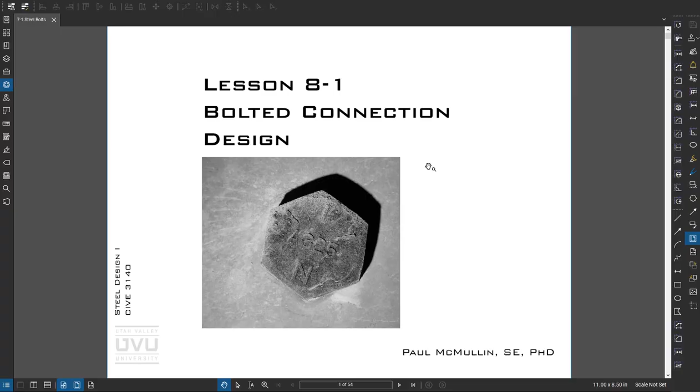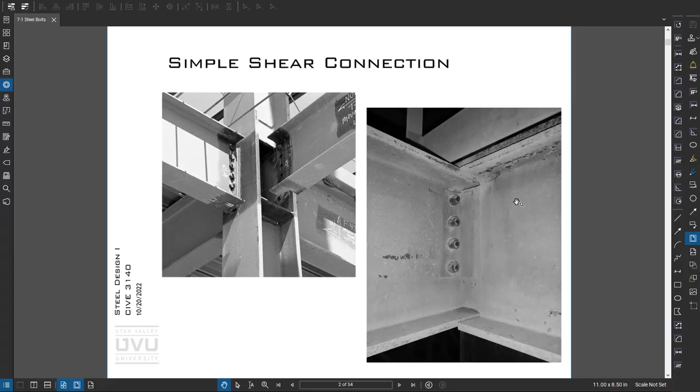All right, guys, let's dive into bolted connection design. So bolts replaced rivets a long time ago. At first, they were viewed skeptically because rivets are extremely strong and robust, and they have a high clamping force. So at first, people were slow to pick up bolts, but over time, obviously now they're the way we do a lot of things. They're great for field connections because they don't require welding, which tends to be far more sensitive to environmental factors.

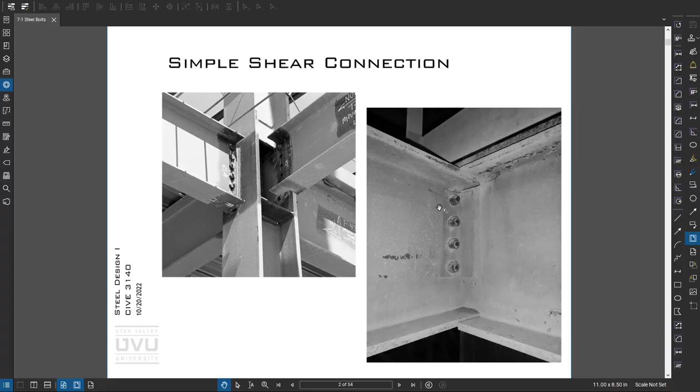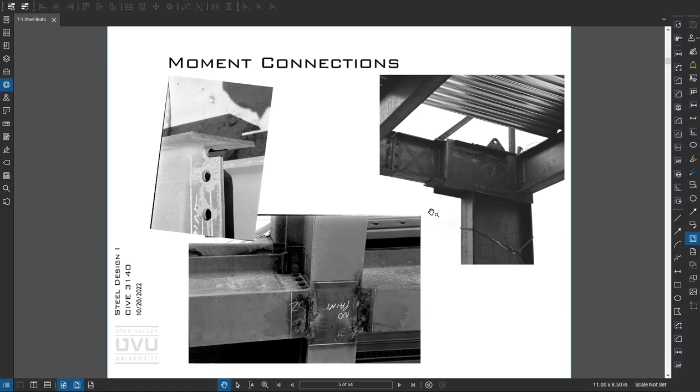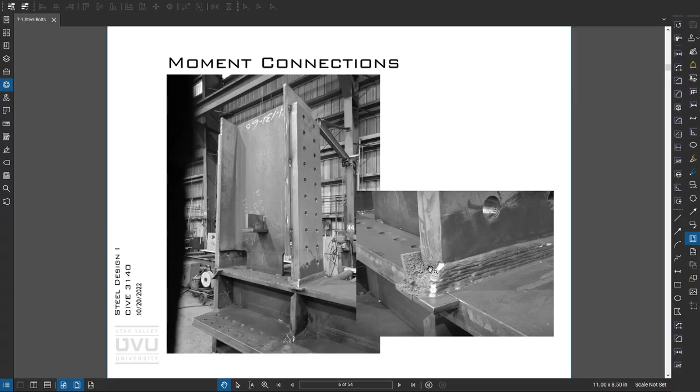Moment connections. You can see here these heavy welds. Here's the joint prep. So that whole face where it meets a column or a flange is welded. Here's a heavy moment connection using plates on the sides. Another moment connection in the shop. You can see how much weld goes into these. These are runoff tabs. So this gets cut off and ground. That way there's room for kind of the crap of the weld to land here, and by the time they cut it back to here, it's nice and clean.

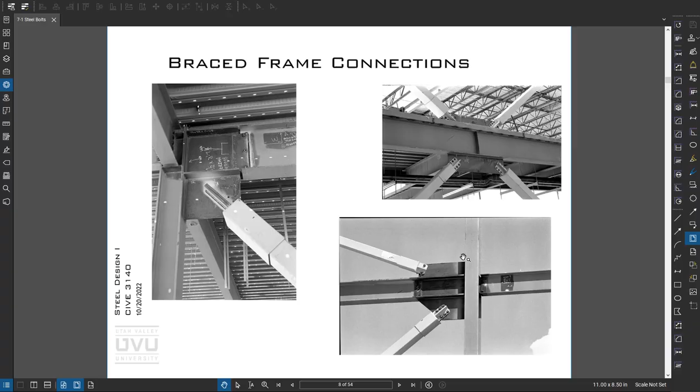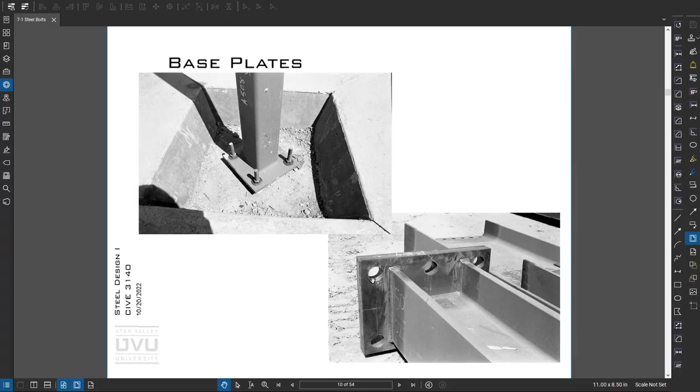Some base plate connections. This one has oversized holes, which allows for some misplacement of the anchor rods, and then heavy washers go on top of those holes. Sometimes they're welded, sometimes they're not. Just depends. Here's an old base plate. Here's a base plate with a shear lug. So that lug goes down into the concrete, into a block out, and it's super effective for transferring large forces.

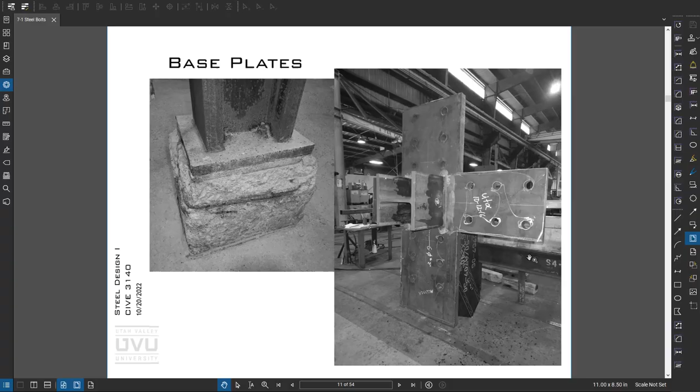Okay, so structural bolts, there's three main classes: snug tight, which are basically tightened with a wrench. Pre-tensioned bolts are tightened all the way, well, close to the bolt's breaking strength. And then slip critical are pre-tensioned bolts, but the surface prep is considered carefully.

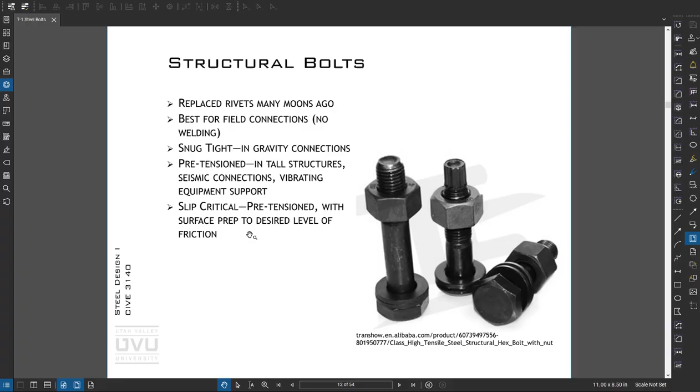Different grades. AISC recently introduced groups, so Group A, B, and C. C is fairly new. Group B is the old A490. Group A, which we use extensively, is A325. Keep in mind that there's a trade-off between ductility and strength. So the higher a bolt gets in strength, the less ductile it becomes. So if Group A bolts work for you, I would suggest going with them. If they don't, you need some extra strength, 490s. I've never seen Group C specified, but there's no reason you can't use them if the code permits them.

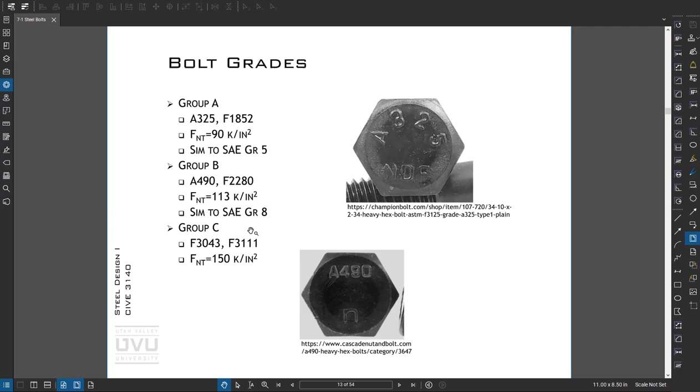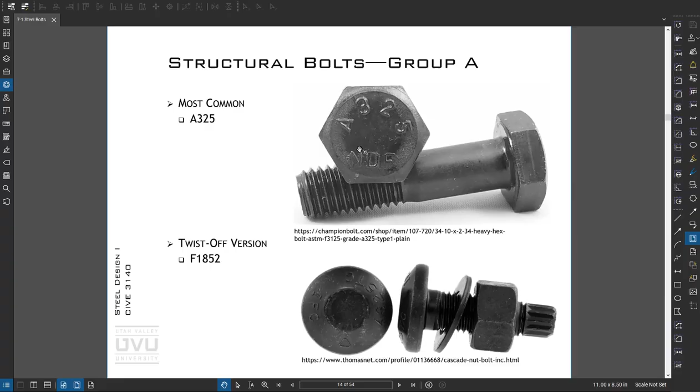All right, there tend to be markings on the bolt which tell you what grade it is. If you go to a job site and you can't see any markings, and sometimes they're not numbers, sometimes they're little lines, you need to ask more questions to find out if they used the right bolts. Nuts, we use heavy hex nuts, which tend to be larger than the normal stuff you buy at Home Depot.

All right, different washer requirements. Unhardened washers you can use with standard holes. You also don't need washers if the bolts are kind of milled properly. Hardened washers we use on the turning surface at slip critical connections. That way there's no galling between the nut and the base metal. Galling is when little balls or little gouges form, and that increases the friction, which decreases the pretension.

If we have long slotted holes, we add plate washers to cover the hole, and then channels and S's. You can see here on this channel the flange is tapered, so it has a washer that's also tapered. And that allows this face and the top face that you can't see to be parallel.

And then tension indicators, there's two types. One are these direct tension indicators. So when the bolt gets pre-tensioned, these little nubs compress, and using like a spark plug gap or those thin strips of metal, an inspector can slide them under, and based on the manufacturer's data, they can tell if it's tensioned up properly. And then these washers here have little paint pockets that when it gets to the right tension, those paint bubbles pop and squirt out.

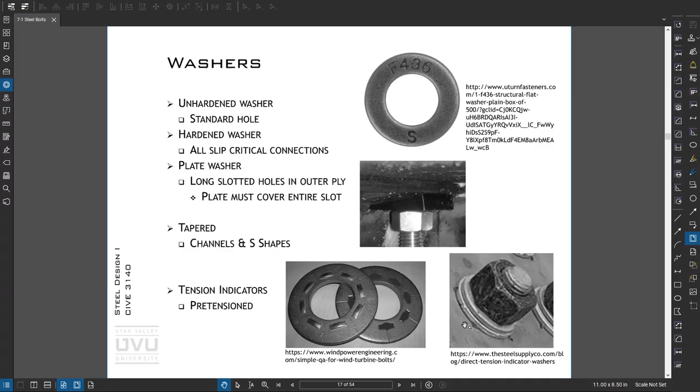All right, low strength bolts we can use for low strength applications. They'll have an A307. Sometimes there's like little lines, different markings. If you don't have a number, then figure out what those little lines mean, and that's sometimes easy enough just with Google.

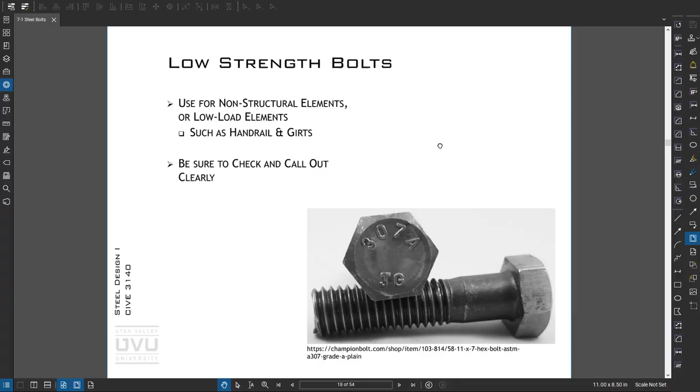All right, projection. Some people will ask, how far does the tip of the bolt have to stick out past the nut? Short answer is it does not. Well, the long answer is that as well. Basically, if the nut and bolt are flush, the nut has the strength to break the bolt. That's the concept.

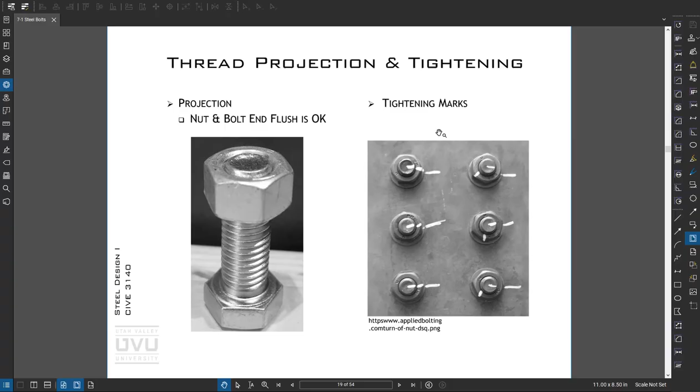Here's some tightening marks. So in this case, it's agreed upon beforehand between the installers and the inspectors how the nuts will get marked once they're tightened. All right, you can watch that bolt video. It's not the most exciting thing, but it'll give you a feel for what's going on.

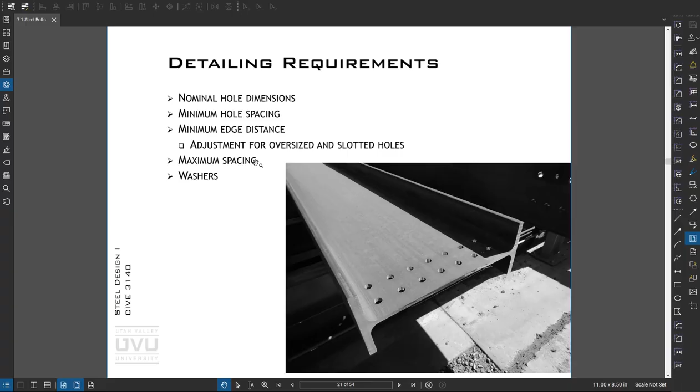All right, so some requirements on detailing, and this is important to understand how it's going to be drawn and built because that's going to flow into your calculations. So there's detailing requirements for all of these things, so let's go ahead and jump into them. First, the nominal hole size for bolts. It tends to be 1/16 over the diameter. So if I have a 1-inch bolt, I have a 1 1/16 inch hole.

There are oversized holes, so those are slightly bigger, and then short slots and long slots. We use oversized holes and slots when we think the mating parts aren't going to line up exactly. So if I'm connecting a beam to a concrete wall, I will use long slots because that buys me some tolerance if that wall is not perfectly plumb, or perfectly where it belongs, which happens. Concrete tolerances are at least plus or minus an inch.

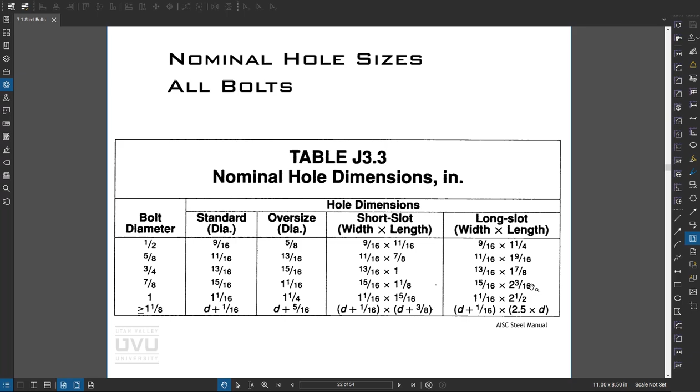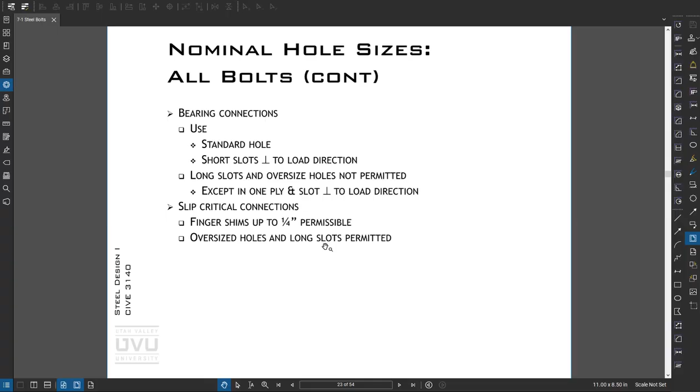All right, so nominal hole dimensions. Here's a little bit of a discussion of when to use them. So for bearing connections, you can't use oversized holes because they allow for too much slip. So you can use standard holes or short slots where the force is perpendicular to the long dimension of the slot. And then slip critical, you can use oversized holes, long slots, short slots, because the force transfer happens through friction in a slip critical connection. So if the holes are bigger than the bolt diameter by a lot, then the friction carries the force.

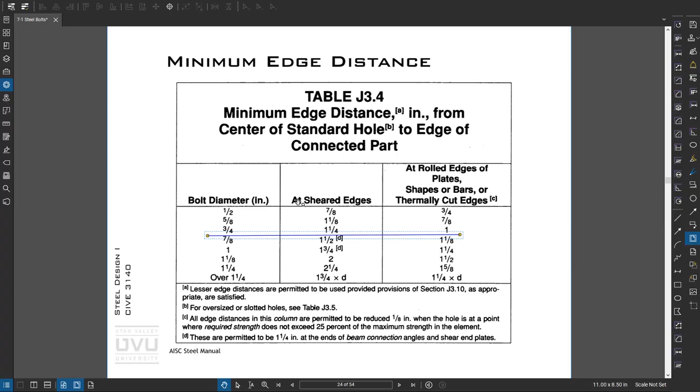Minimum edge distances. So this table is a little outdated. It's actually this side now, where for a 3/4 inch bolt, which is the most common bolt, the edge distance is 1 inch. They got rid of these in one of the code versions recently. All right.

Hole spacing. So the minimum is 2 2/3 times the diameter. Preferred is 3 times the diameter. But in practice, if you can use a 3-inch hole spacing, that's ideal because that matches shop equipment. Back in the day when dinosaurs roamed, the drill lines had drill chucks every 3 inches, so you could have multiple drill bits running at the same time drilling holes. And because they were 3 inches apart, that kind of became the standard spacing for holes. So usually for 1 inch bolts and under, we'll use a 3 inch bolt spacing. And then when you get to the larger bolts, then it needs to go up.

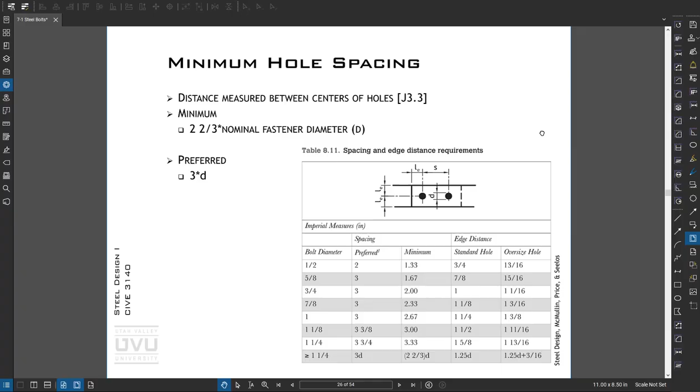Anchor rod sizes. Let's say we have a 1.25 inch anchor rod. You can go up to a 2 1/16 diameter hole. And again, like we talked earlier, that is for the purpose as if the anchor rods on site were misplaced or slightly off. This gives the ability to not have to mess around with the bolts or the holes in the field. You can just set the column, adjust it, and then we put a washer, and it tells you the minimum size over the top of that hole to make up for the gap.

I would suggest doing this on every project because when you stop and think about locating anchor rods, first surveying them correctly into position and not having them move during placement of concrete, things do shift, things are going to be off. So giving the field flexibility that they don't have to call you or stop the job to figure out what to do because an anchor rod is a 1/2 inch out of place.

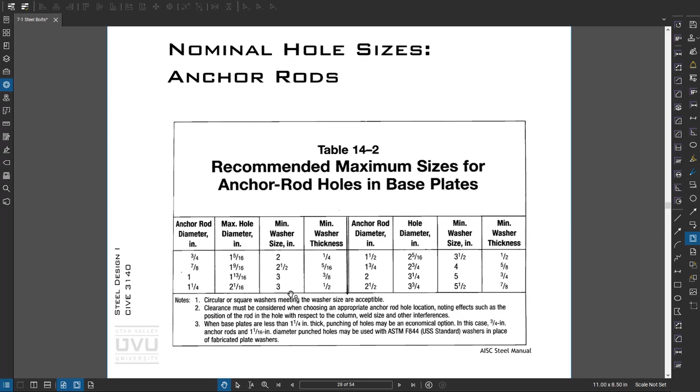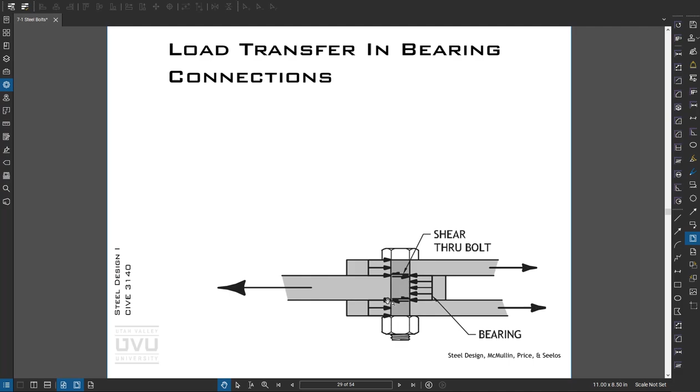Okay, let's get into force transfer of bolts. If we have bearing connections, let's say the force comes from here, it's going to bear on the bolt head or the bolt shaft. It'll transfer through the bolt in shear and then back into the other piece of material in bearing and then back out. So that is a very common type of load transfer in buildings.

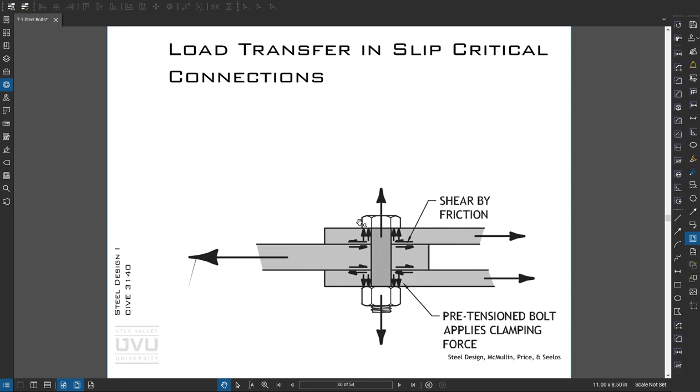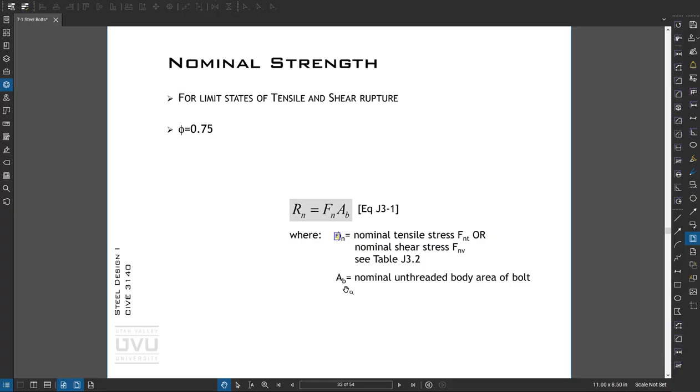I tend to always use the not excluded because I don't have full confidence that that won't happen in the field. Bolt lengths get swapped based on need, and I think it's not quite accurate to think that if I say I don't want any shearing threads in any shearing plane, that really will be 100% guaranteed.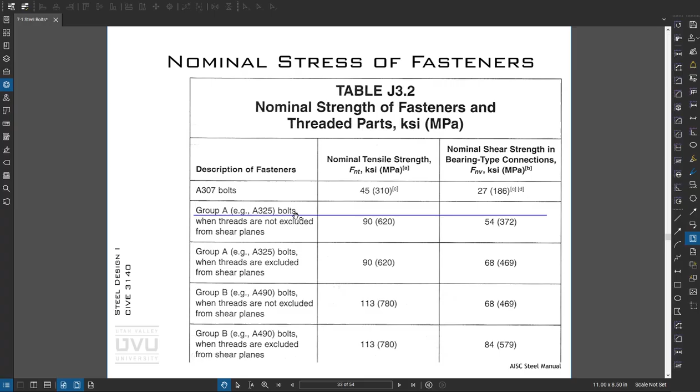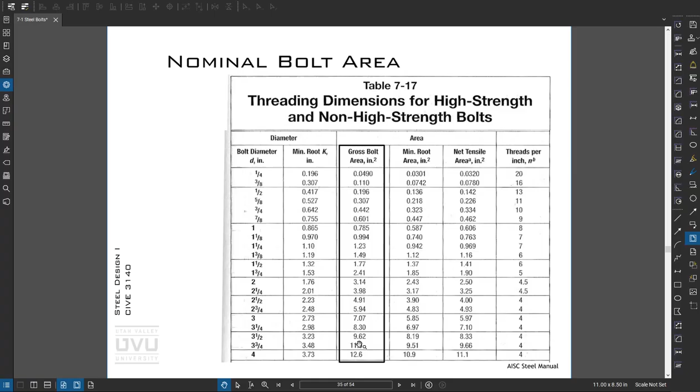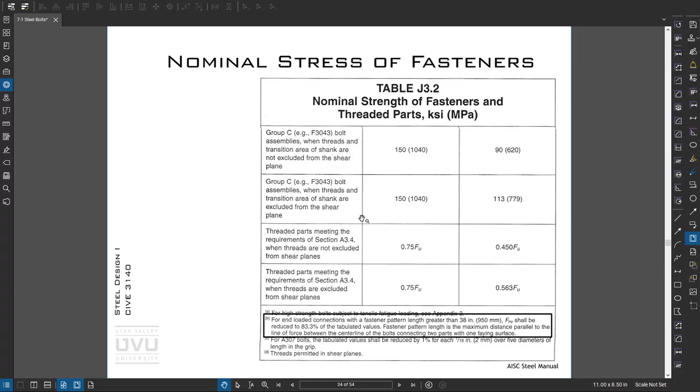So anyway, you pair this equation. Really, you could write this out as two: one a shear strength equation and one a tensile strength equation, and then the value of strength is from this table. Table 7-17 is great. It gives you the gross area of the bolt. You'll notice the root area is smaller. We want to stick with gross area because the code takes into account that reduction in area for us, which is kind of nice.

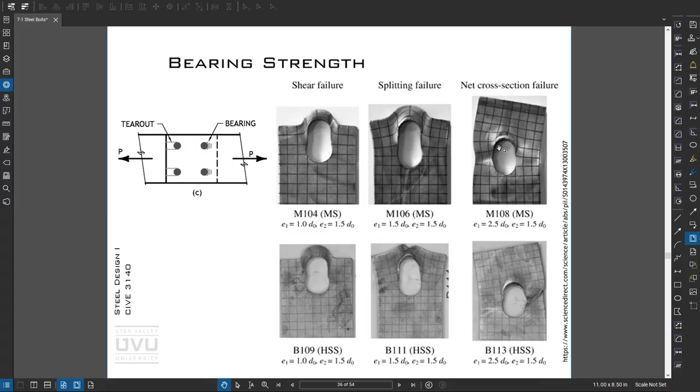Okay, so let's talk about bearing strength. What we just looked at is the shear strength as though the bolt is getting sheared completely through. The other thing we need to consider is what happens when the bolt impinges on the plate. If the plate is too thin, we get different failures where the bolt has pushed in substantially into the material. Here is a bolt with a small edge distance, here a moderate edge distance, and here quite a large end distance. So you can see some yielding here, but also some deformation there.

All right, these failure modes are handled by these two equations. And there's actually two sets of those, one for deformation considered, and another where it's not considered and these factors are slightly higher. It's better to use the deformation considered because it reduces the joint yielding, and the reality is this tends to work pretty easily with moderate thicknesses of plate, so it's not that hard to make work. Okay, so in here we're going to take the minimum of these two equations.

Bearing is this first equation, so it's a function of the bolt diameter, the plate thickness, and the ultimate plate strength. Tear out would be this failure mode. So bearing is what we just talked about; tear out would be that. It's a function of the length from the edge of the hole to the edge of the plate, thickness times the ultimate strength. Phi factor is 0.75. Again, you take the minimum of those two, hit it with your factor, and move on from there.

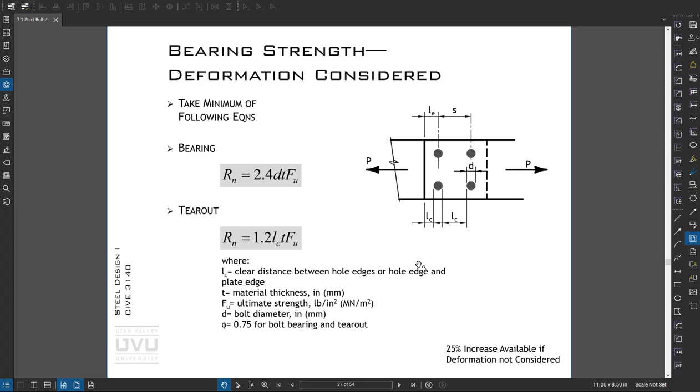And then I've got a note here, you get 25% greater strength if you don't consider deformation, and we talked about that. All right, slip critical bolt strength, just briefly, coefficient of friction. So that'll either be 0.3 or 0.5. 0.3 is easy to achieve. 0.5 is much harder. You have to blast clean it or use a paint that has a coefficient of friction that's class B.

So if you spec slip critical bolts and you spec class B, it tends to be more arduous for the contractor, which is fine. All right, so coefficient of friction, this ratio between what you specified and what actually got installed. h_f if you have shims. T sub b is the bolt tension, and then n sub s would be the number of slip planes. So if you have two slip planes, you get double the strength, which makes sense.

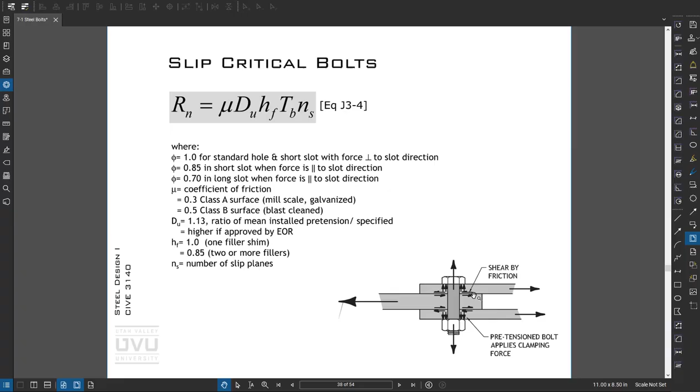Make sure when you're counting slip planes that they're legitimate and you're not taking advantage of things that don't actually transfer force. All right, is it T sub u or T sub b? T sub b is given here, so this would be your minimum bolt pretension. So for a 3/4 inch bolt, 28,000 pounds of force. That's pretty serious.

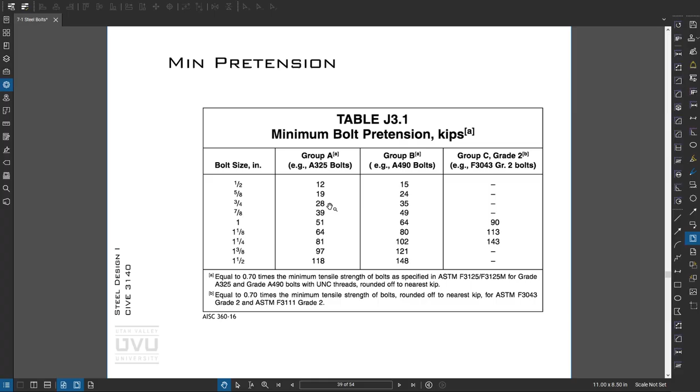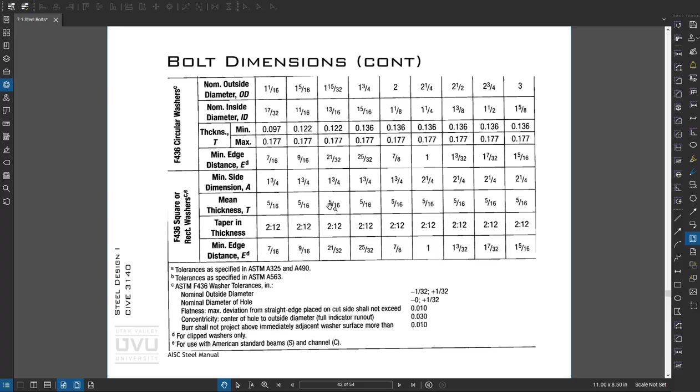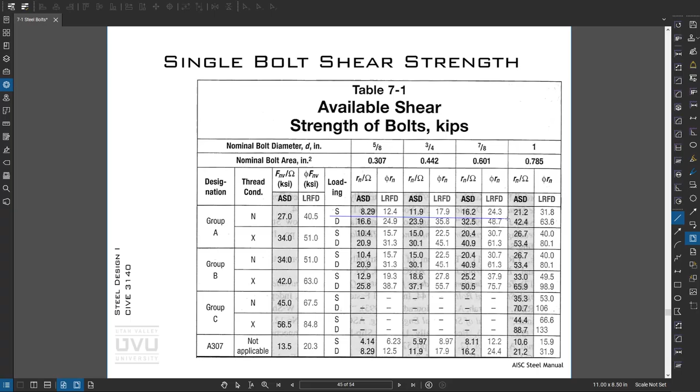All right, some tables from AISC, which are fantastically helpful. Bolt dimensions, entering and tightening clearances. So how close can you put the bolts together? Very valuable. Different capacities. So here's a shear strength. So if I have a group A bolt with the threads included, single shear, so the S here, and I have a 7/8 bolt, I have 24 kips of shearing capacity.

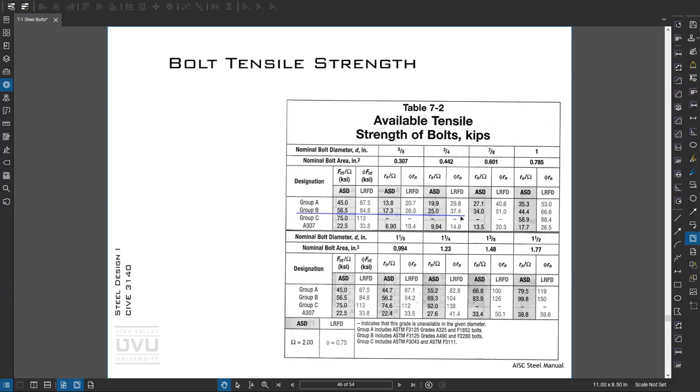Similarly for tension, let's say I have a group B bolt, that's 3/4 inch. I have 37 kips of tension capacity. These bolt bearing tables are great. Notice that they're kips per inch of thickness. So any value you have here, we need to multiply by the thickness of material. So if I have a 1.25 inch bolt, which is quite big, with a 2-inch edge distance and 65 KSI material, I have 77 kips of bearing capacity per inch. So if I have 3/4 inch plate, I could multiply that value by 3/4 and have my strength.

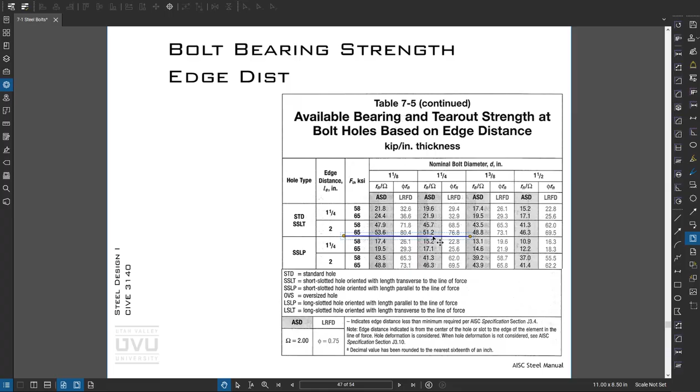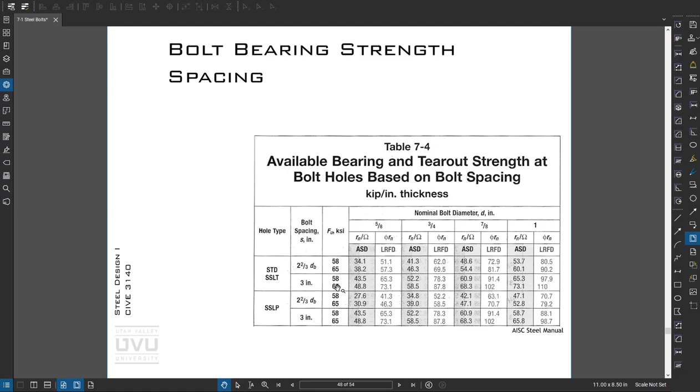The next table is bolt bearing based on tear out, so I need to use the minimum of these two tables. And some of the drivers are bolt spacing and material strength. All right, slip critical capacities. Similar to the previous tables we looked at, you only get shear capacities for slip critical because that's the point.

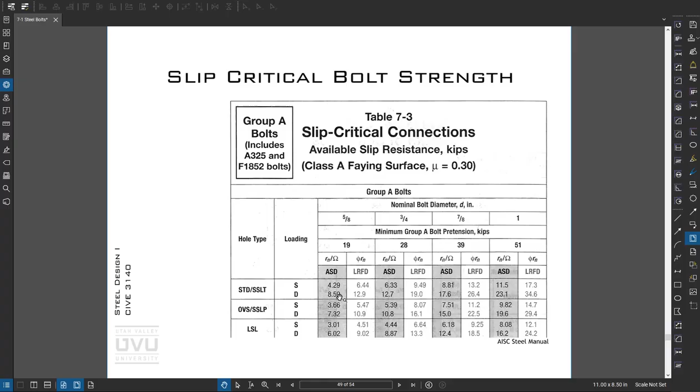Prying, so this is important. If we have a load applied and there's a bending mechanism somehow in the system, which happens all the time in connections, it actually puts a moment on the bolt and causes additional stress. The easiest way to handle this is to size your plate based on the t-min, so it's the minimum thickness where prying doesn't have to be considered.

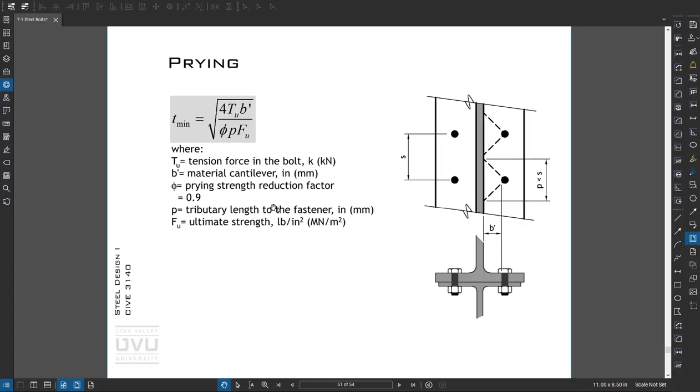So it's a function of the bolt tension, b prime and p, which are geometry factors, the strength, and a safety factor of 0.9. I start here. If I can't get that to work, you can dive into the equations for prying, which are more complex, but they do give you a slight advantage where you can show things work in prying that this equation doesn't show.

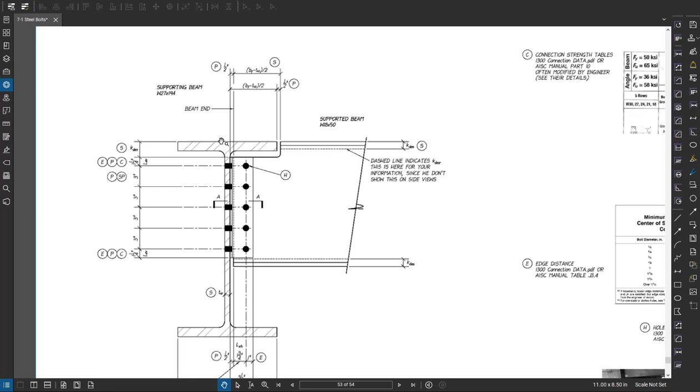All right, some geometric information. So I've provided you this PDF, and let me pull it up. So if I have this joint here, sometimes it's hard to remember or know where all these dimensions come from. And so if you come here, let's say I've got this 1.25 inch edge distance, I can come over here and say it comes from this edge distance requirement. P is standard practice. What does the shop do? And then C is going to come from the connection tables.

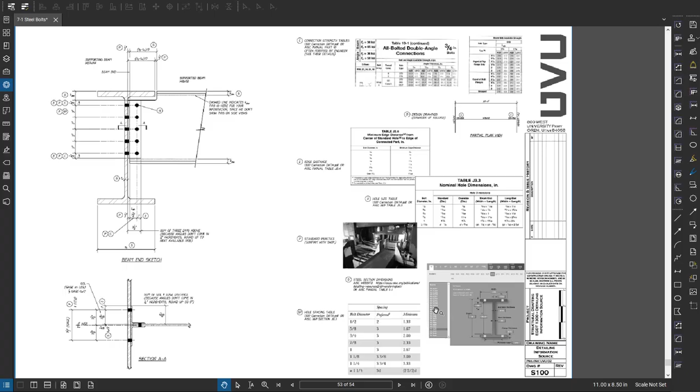So I put this together as a way to help you understand for every dimension in a connection where the data come from to design that and lay it out properly. Okay, and I think with that, that's it. I have provided this PDF in full, not just part of the thing, so it's a little easier to read.